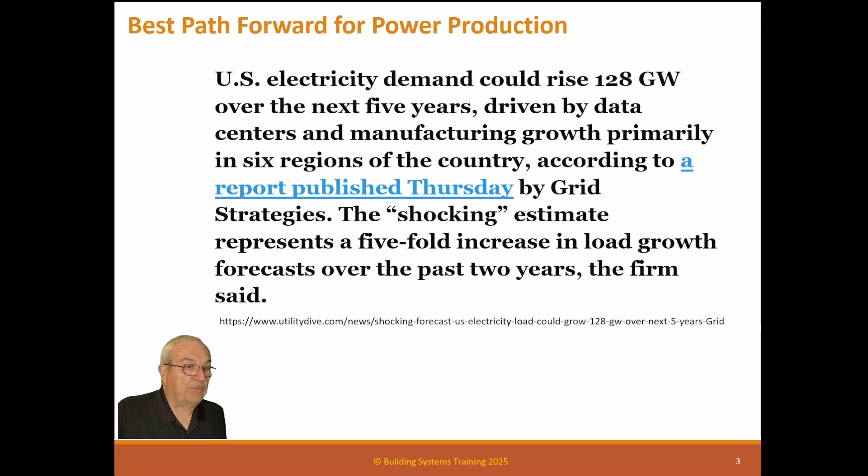What's the problem with that, you say? We haven't been building any big power plants. I'm talking about 1,000 megawatt power plants. We've had one nuclear power plant come online the last 10 years, no big gas ones at all. So it's a problem. Best path forward.

So here's a projected growth. From our data, we said we had 4,178,000 gigawatt hours per year, and the existing power plants are 476.94 gigawatts. The 5-year growth is predicted to 552.30, which is 75.36 gigawatts. That's 75 new 1,000 megawatt power plants in the next 5 years. 75 of them, and that's mainly in 6 different areas.

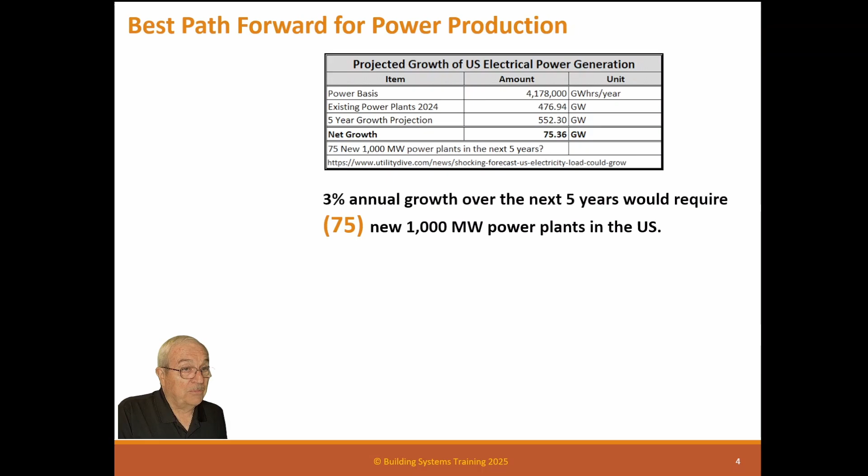So if it's a 3% annual growth, which was their normal projection, now this one I just read you was almost double, that's 5%. Over the next 5 years would require 75 new 1,000 megawatt power plants in the U.S. Now, we've only done one in the last 10 years. Where are we going to build these 75 major power plants?

Major growth in 6 regions would equal 12 1,000 megawatt power plants in each region. Can you imagine building 12 major power plants in a region like a 3 or 4 state area? This is a problem. The power people are scratching their heads, they're not sure how they're going to get there. And the people that are promoting everything else that requires it just got their head in the sand and said it doesn't matter, it'll happen. I don't know, this is a train wreck in process.

So the existing power grid is not large enough to transmit that much power across long distances. So these power plants are going to have to be built close to the load, and that's something we haven't done in the past. We put the power plants out of town - we don't want to see them - and transmit the power in, which involves line loss, cost, and infrastructure. Well, this is actually saying we can't do that. We've got to do something else.

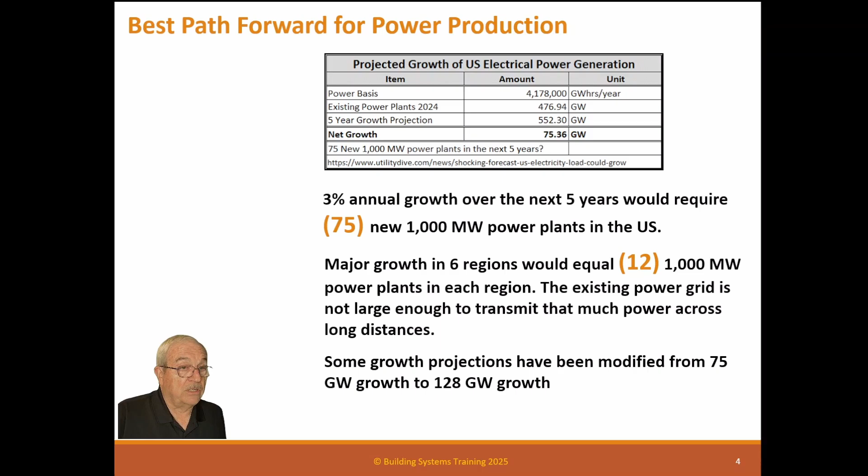Some growth projections have been modified from the 75 gigawatts to 128 gigawatts, which would mean a lot more power plants. Due to regulatory hurdles and environmental concerns, building large traditional power plants has significantly decreased in the U.S. People that are concerned about health, which I agree with them, but we've just killed everything that we do. We've killed all the major petrochemical plants. We've made the permit process so difficult that it takes people forever.

Now remember, these things only happen if there's profit involved. If you make it so there's no profit, they're not going to happen. Because remember, the government is the very worst selection to try to do anything. Government can make decisions on where we're going to go, but they can't help get there - they're not capable of doing that. They can't run a business. Most people in government have never been in a business, have no idea how this works. And that's kind of unfortunate.

Only one nuclear power plant is brought online, and that was just a cell of an existing plant in the last 10 years, which is unfortunate. We could use more of those.

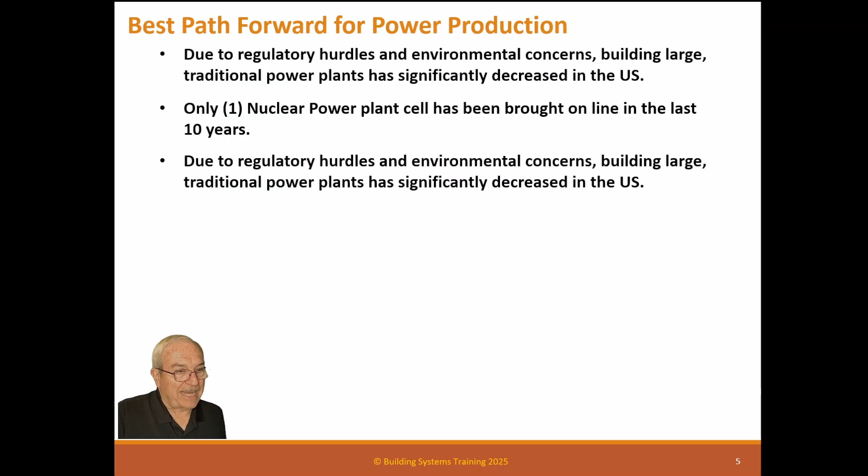Now, a lot of people are against nuclear power because it's so dangerous. But I've actually worked in a nuclear power plant, a coal power plant, and gas power plants. I've done a lot of assessments telling them how good their facilities were and how to financially assess their systems so they know how they need to spend money. And so I've been able to compare those three different types of plants.

Now, the actual nuclear deal is kind of scary. Problem areas are very, very small. They've had very, very few.

And Arizona has one of the largest nuclear plants in the world. They have 3 major units doing 4,000 megawatts. It's been in operation since 1975 or '76, something like that. And it's basically stored all of its used fuel on site in the parking lot. They have these 12-foot diameter concrete casks, about 20 feet tall, and they have like 10, 12 of them out there, and that's provided the fuel for that huge plant for all of these years.

And if we were smart, we could actually use that fuel to create other fuel and get rid of it. But we haven't figured that out yet. Politically, we haven't figured that out.

So basically, to me, in my way of thinking, if you want to do low carbon, nuclear is the way to go. Because you can build a nuclear plant, it has a long lifetime, it has a great uptime, and it doesn't use any burning fuel. The burning fuel is all at the small level that it doesn't produce gas. So to me, that would be the way to go, but other people have to make that decision.

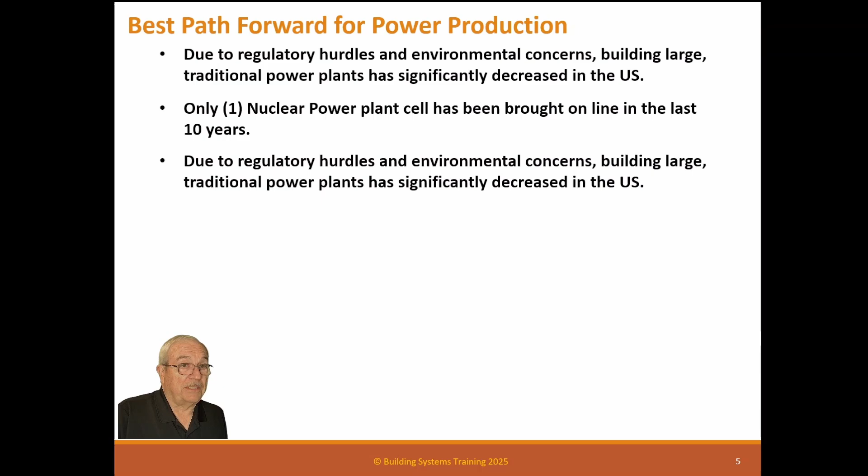Most new power generation capacity in recent years comes from renewable sources like solar and wind, often built in small, distributed projects, developed and built without regard to lifetime or uptime. This is a problem. I understand the excitement of building solar. I've been involved in the solar industry for a long time, but this is not the way to go to secure our energy future.

We must look to other ways, and that's what we're here to discuss today: what are these other ways? Obviously, these issues are going to collide with the demand growth of our power infrastructure. Next year, you're going to really start to hear this. And in 5 years, it may be a crisis.

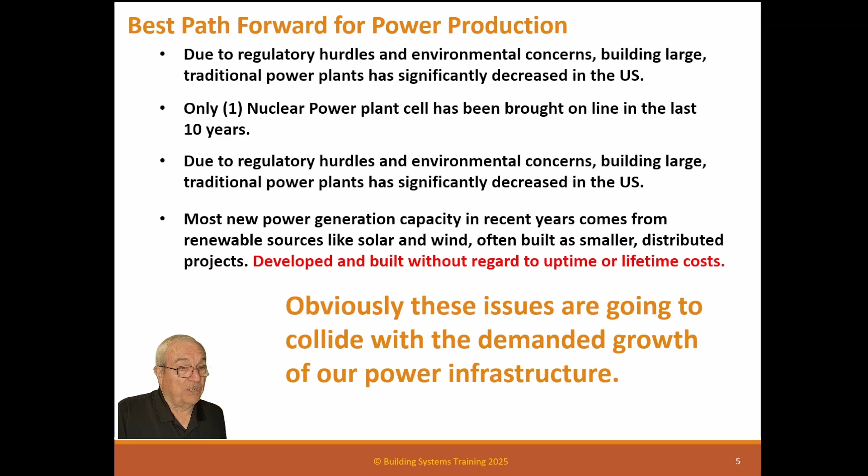Because remember, power plants don't come easy. It takes a year or so to design a gas power plant and a couple of years to build one. A nuclear plant takes 10 years to plan and 10 to 20 years to build. So they take a long time.

We need to look in the future. So we need long-range planning instead of panic reaction. And unfortunately, I think we're going to be driven towards panic reaction. But still, we need to plan for the long term. Reacting only to panic growth will lead to poor choices of what kind of power plants to construct, which will lead to higher costs and more future disturbance.

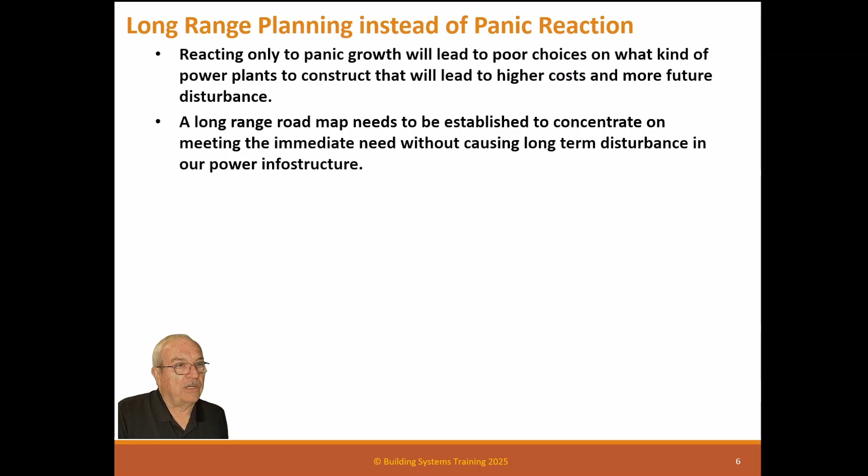A long-range roadmap needs to be established to concentrate on meeting the immediate need without causing long-term disturbance in our power infrastructure. Using a middle-of-the-road philosophy to prevent radical approaches that aren't feasible in the long term or for cost - achieving a radical goal while going bankrupt makes no sense. So whatever we come up with, we should be middle of the road and practical in cost.

Now, we still want to watch pollution and we want to watch CO2. We don't want to go crazy with producing that, but we need to understand that we need to be middle of the road to be able to help our country grow. Because where we're at right now, we're doing nothing, and we're just arguing with each other, and that isn't going to work.

So, I'm a commissioner, and I've been a mechanical contractor, I've been an engineer.

We need to be meaningful in what we're doing with this. We need to be middle of the road. We need to do this correctly and not just jump off at the nearest thing. So I'm again for that middle of the road, stay out of the bar ditches on either side.

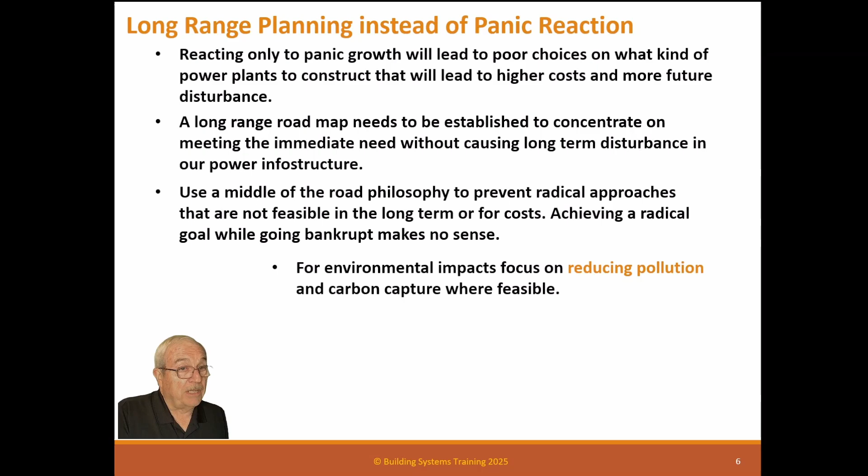For environmental impact, focus on reducing pollution and carbon capture where feasible. We're trying to concentrate on carbon, which is hard to do down to the input level. So this is the problem: if you go from 100% to zero, that last bit, from 20% to zero, is really, really hard and really, really costly.

If you just want to reduce CO2, it's not that costly and still will help us get where we're going. Yet people refuse to do anything, which is not reducing anything. So we need to do that for environmental impact.

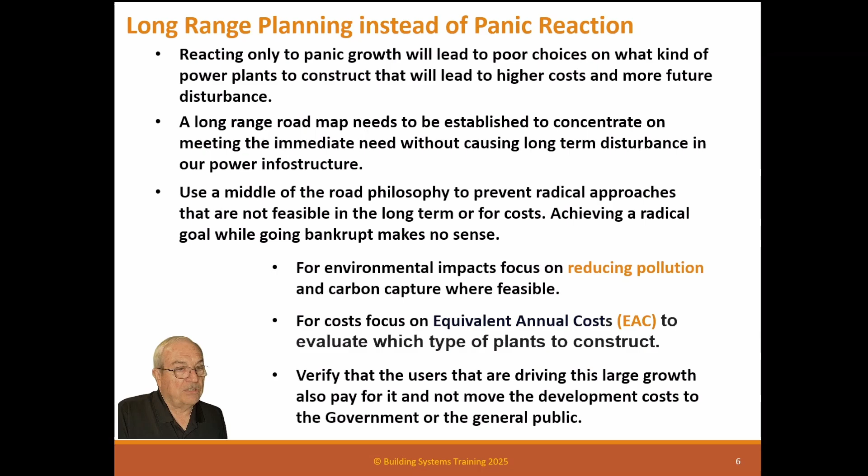For cost, focus on equivalent annual cost, EAC. It's the best way to evaluate between alternatives and which type of plants to construct. Verify that the users driving this large growth also pay for it, and not move the development costs to the government or the general public. That's a concern, because if our utilities start ramping up to provide those data centers, it means the costs are going to go up across the board, and that should not happen.

So I think our roadmap needs to have future. We need to plan for our future: continuous investment for fusion power. I think we need to keep the pressure on to develop fusion to get it down the road further.

Investment for developing coal hydrocarbon conversion. Now, like I told you, I've worked in nuclear power plants, gas power plants, and coal power plants. My experience tells me we should not be burning coal at all, and it's not because of any political statement. It's just nasty, it's dirty. I don't know how the people work there, how they survive working in that environment. There's coal dust everywhere.

Everyone has breathing apparatus because it is so dirty. I've seen brand new air conditioners installed, and in three months they look like they were 20 years old. There's dust clinker everywhere coming out of the stack. Even though we had full carbon particulate capture and scrubbers on everything, it's still not perfect. When they maintain it, it gets around it. It is nasty, dirty.

We need to take the coal. Coal is a great resource, but we need to do other things with it besides burn it. We need to convert it to synfuel. We need to do whatever we can to make coal beneficial to us, but burning it is not one of them. Coal is the most polluting, the most CO2-producing. There's all kinds of reasons not to use coal.

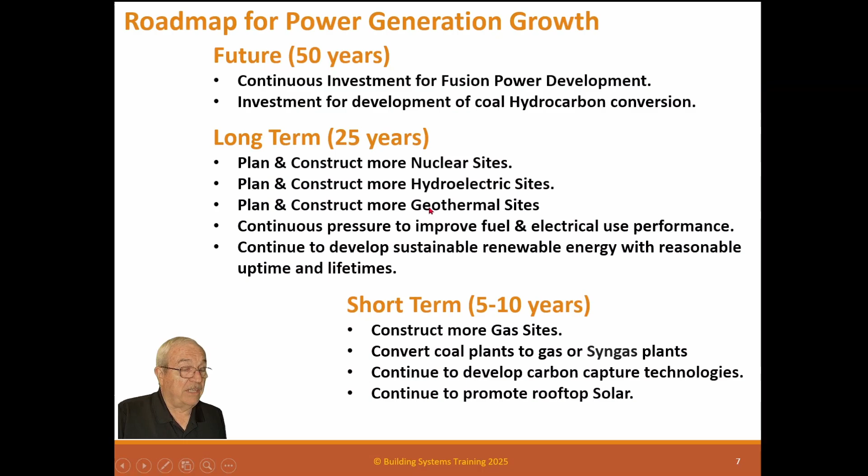I would also say don't do tax rebates. But maybe you want to do tax rebates if you're trying to establish an industry. But once an industry's established, which I think it is, it should be able to stand on its own.

Also, I think that we need to come up with a reasonable way to charge road tax on electric vehicles. Right now, we put a tax on fuel. Well, they don't use fuel, but they still use the roads. So we need to have a mileage tax. That electric vehicle has to pay a mileage tax where a regular gas fuel vehicle pays it on fuel. It's not right for someone to be able to use the roads for free when others have to pay the bill. That's not what we're all about.

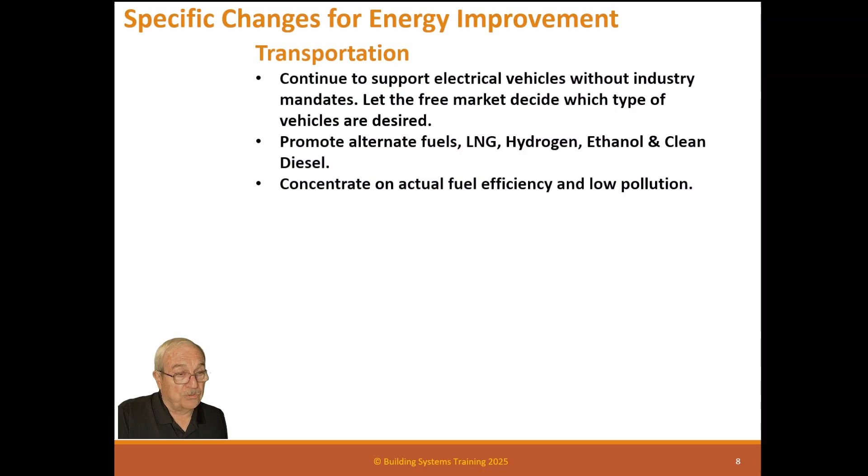Concentrate on actual fuel efficiencies and low pollution. We need to continue to build the most efficient machines we can and the lowest pollution machines we can. Why would we not? If we can build a car that gets 30 miles to the gallon, why would we not do that? We shouldn't be building ones that only get 10 miles a gallon. We should build them to get better and better, and I think hybrid is the answer for the near future. Build hybrids that get 30, 40 miles a gallon, away from the 15 miles a gallon, and that would reduce our CO2 significantly, instead of saying no, it has to be 100% electrical. That's foolish. That's religion again instead of science thinking.

Residential buildings: continue to support rooftop solar and energy storage. Require contractors to guarantee proposed production, like I said. Now, I personally haven't done it, but I had a young man that worked for me, and he had a Tesla electric car, and he had rooftop solar, and he had battery storage in his garage. So he basically produced all the electricity his car needed at no cost. He never had to buy fuel. He never had to pay for the electricity to run his car. That was a significant savings to this young man, and I was impressed. That's the way to do it.

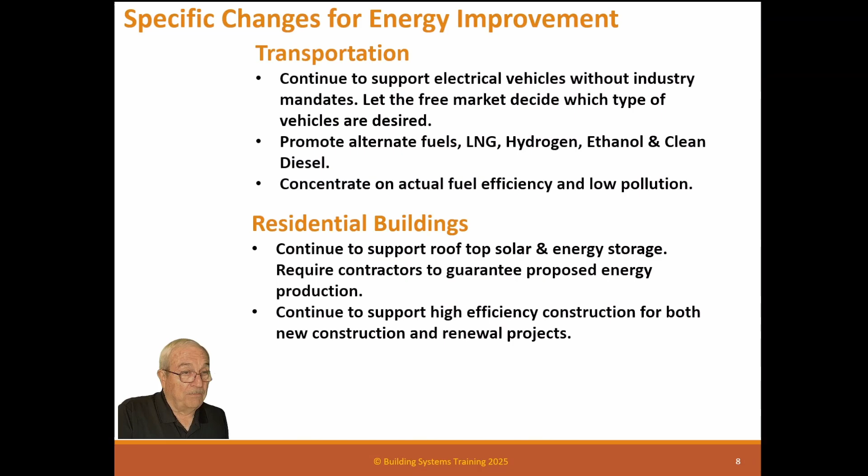Continue to support high-efficiency construction for both new construction and renewal projects. Always keep pushing that our residential buildings are more energy efficient and more livable than what they are today.

Because think about it. If you buy a collector out of China, China mines the coal, builds power with coal, smelts aluminum with coal, powers all their plants with coal. They build a collector, they sell it to you, and they put it on a ship using diesel fuel. And it gets here to America using diesel fuel, and then it's delivered to you using diesel fuel. And you think that collector has no carbon in it? That's foolish, it has a lot of carbon in it. So we need to understand that to be able to make better decisions. We should be able to decide, okay, a collector built in Ohio costs $10 more, but has this much less carbon in it. This is a better deal. You need to know that.

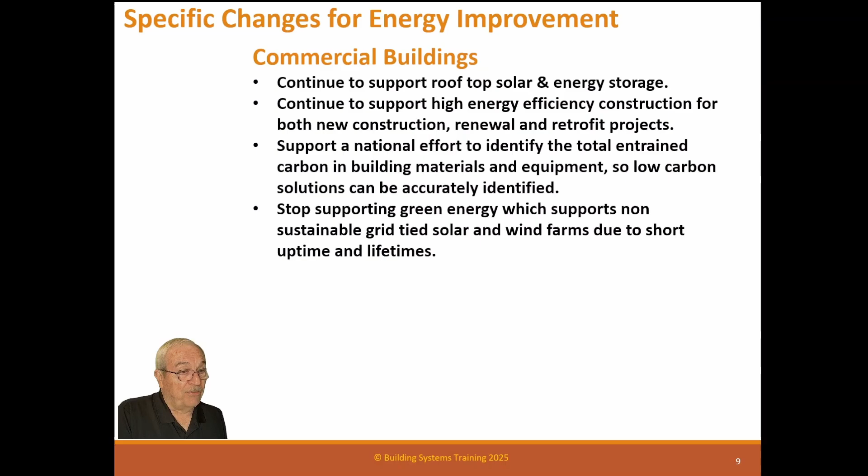Stop supporting green energy, which supports non-sustainable grid-tied solar and wind farms due to short uptime and lifetimes. Green energy is not a good deal. That's a false narrative when it comes to actually being green.

Promote continual energy use improvement over time. Most of our buildings, the minute you finish building them, begin to degrade in performance over time. That's normal, except you should have operator staff who understand how to make it better and better, not worse and worse. There is a way to do that, and we should be doing it all the time.

Industrial buildings continue to support high energy efficiency for both new construction, renewal, and retrofit projects. Industrial buildings really shouldn't be using solar. If you're building a smelter, you're going to have gas - there's no other option unless you want to burn coal, and I don't recommend that. You're not going to be able to do that with a heat pump. So industrial is off the books as far as that - you're going to have to burn gas. Concentrate on lower total pollution, because this is where our industry pollutes, in the industrial sector, and we need to stop that. Lots of pollution.

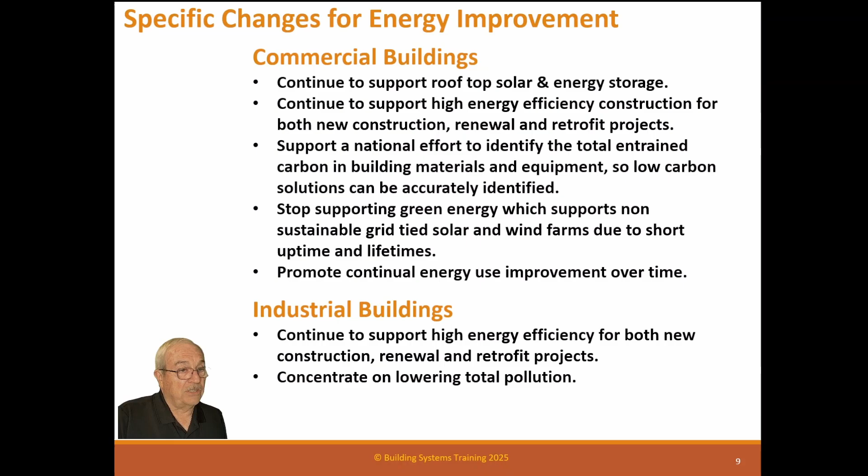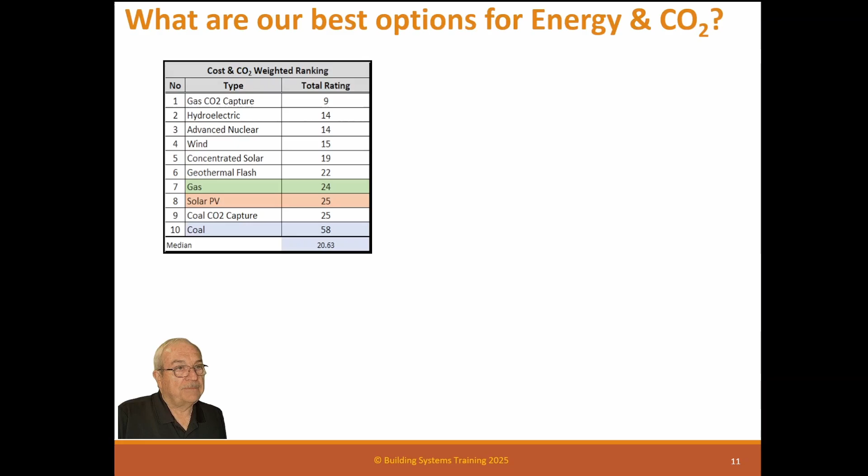What are the best options for energy and CO2? Here's my chart from the previous session. Number one, don't burn coal - I've explained that enough. I think coal is not healthy. Point of use solar, I'd like to see that continue, even though it has short lifetime and short uptime, but it's right there with the user, and he can make the decision. Look at gas with CO2 capture - that is by far the sweet spot for building a new plant.

New nuclear sites, I think, are a must for the future. We must build our baseline with hydroelectric and nuclear, and then let the others fill in around it - advanced nuclear, geothermal, if we can find more sites that would be beneficial, let's do that. And then, of course, gas sites are going to have to be the go-to for the short term to keep our power production up. There's no other answer. If we don't build short-term gas plants, we will fail because we won't have the infrastructure or electrical power to generate what's coming our way.

Coal conversion with syngas, or whatever we can do with coal - it has hydrocarbons, and we need hydrocarbons. We can get them out of coal, we just have to figure out how to do it in an economic fashion. Ethanol - we need to continue producing ethanol. It's a fuel, it can help us with rockets, it can help us do a lot of stuff. We need to keep doing that, as long as we don't need to eat the corn. If we don't, let's make ethanol.

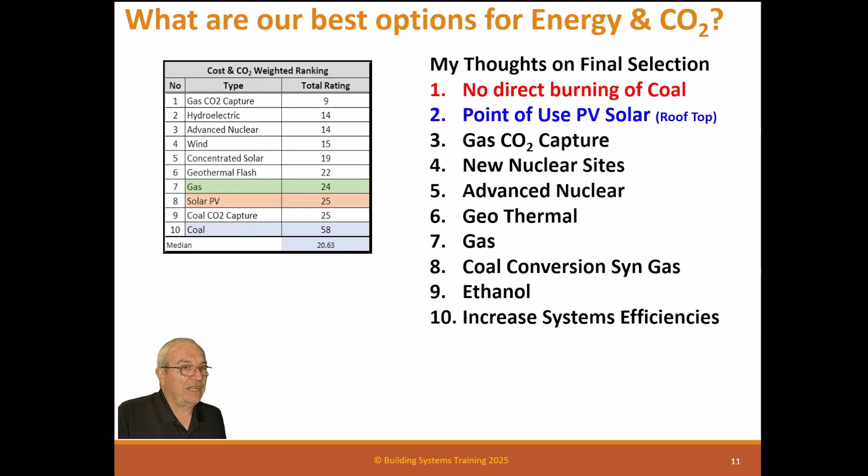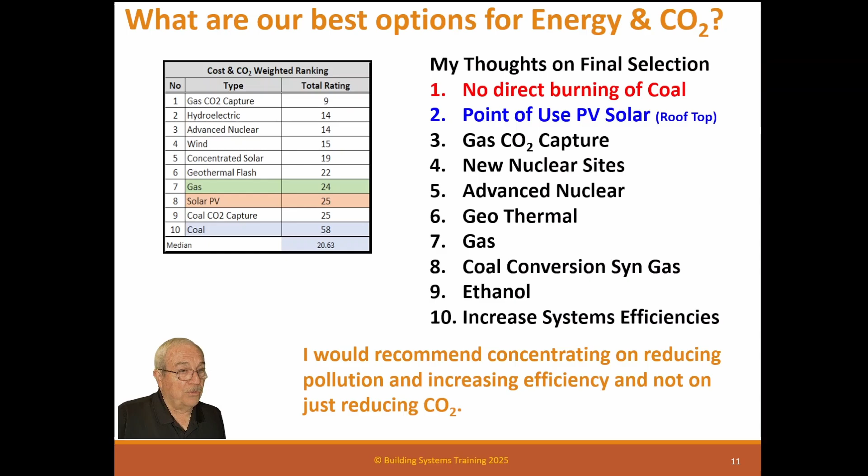Increase system efficiencies - that should be our mantra. Be as efficient in everything that we possibly can be. I would recommend mainly reducing pollution and increasing efficiency, and not just complain about reducing CO2. I think that misdiagnoses what we need to do. Let's be the middle of the road, let's get things done, and let's become better and better at what we do.